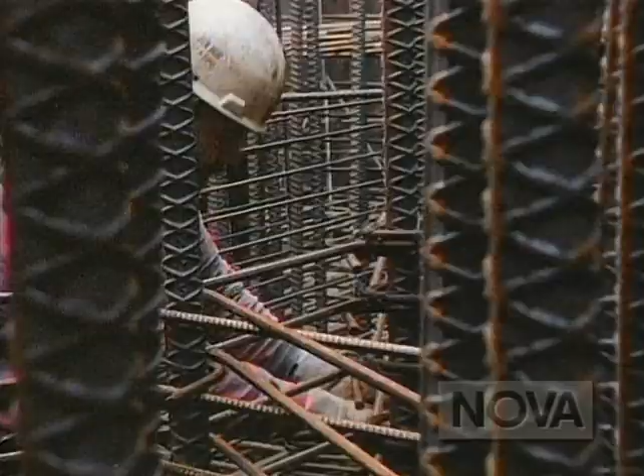Tonight on Nova, the Mississippi gets a state-of-the-art bridge. Nobody had ever done this before anywhere in the world. Be on site as we dive and drag, pound and pour, around the clock, against the elements. Lately, our luck's been running pretty sour. You can't control the load. It's out of control. Make way for the bridge of the future. A Nova 2-hour special, Super Bridge.

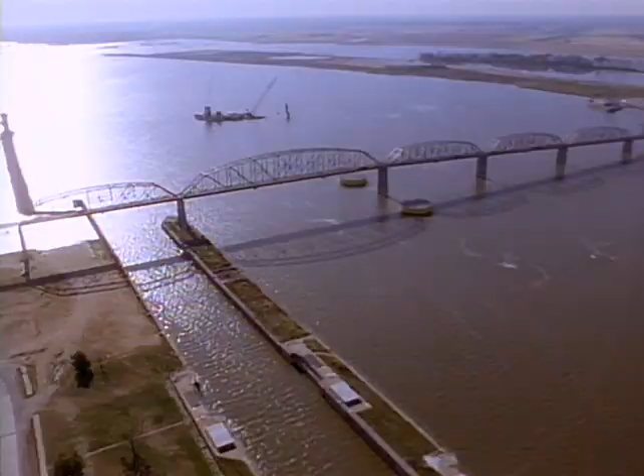And as the bridge ages and becomes less and less fit for the job it was meant to do, Alton begins to fear that its economic prospects are being squeezed as well. By the late 1980s, the town and the state governments of Illinois and Missouri are all in agreement. They and the river need a new bridge at Alton.

Over the next 4 years, Joe Leach will supervise a team of specialists who will ensure the quality of the new bridge. A consulting engineer, Leach has been hired by Illinois to check every detail of construction. Nothing can be taken for granted. At stake will be Leach's reputation, his career, and most importantly, the public safety.

We have a contract with the Illinois Department of Transportation, but we have a bigger contract, and that contract is with all the taxpayers in the state of Illinois and the general public that will use this structure. Because when we walk away from here, we want the general public to believe, as they should rightfully so, this structure is sound. You can use it, and you can use it safely.

Every time a bridge crosses a river, it has to solve a unique set of problems in safety, aesthetics, and cost. Changes in technology have always led engineers to new designs, but it's never an easy choice.

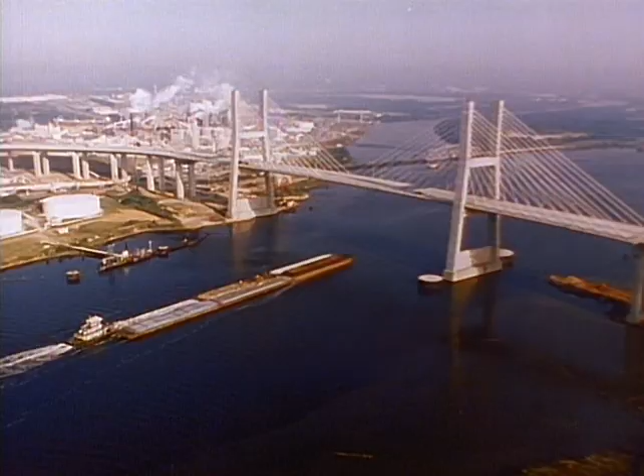The designers of the new Clark Bridge begin with a single pair of towers which will support the whole main span. Ordinarily, the cable stays would be placed in a single plane like this. But the Illinois Transportation Department wants the road deck supported at both outside edges, not only for maximum stability, but also for minimum cost, because a well-supported deck can be lighter using less steel. It's an innovative and cost-cutting design that has never been attempted quite like this anywhere in the world.

500 miles to the south in Vicksburg, Mississippi, the design will meet one of its first real tests. The Army Corps of Engineers has built an exact model of the Mississippi where it flows past Alton, between the old bridge and the site of the new bridge. Even the tricky currents and eddies are perfectly reproduced. The point is to see how the river, the old bridge, and the new bridge will interact.

In their design for the new bridge, the engineers have put one tower, or pier, right at the edge of the shipping channel, and the other pier as close as possible for the shortest and thus cheapest main span. This is the original location of the Illinois pier of the Clark Bridge. The Missouri pier location was fixed, and the navigation span was going to be 687 feet.

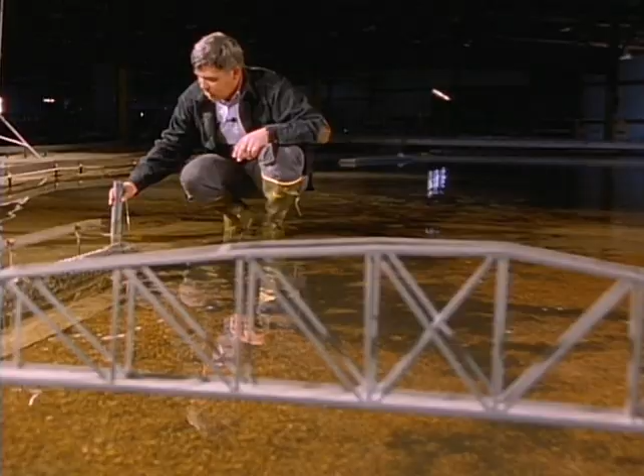After we evaluated the initial spacing of 687 feet as it was originally designed, we looked at extending the spacing to 850 feet from the Missouri Pier to the Illinois Pier. One of the concerns is that the longer you make this spacing, the more expensive you make the bridge. Eventually we looked at different alternatives, and the final resolution we came up with was to move the pier so it lined up with the trail dike that the Corps of Engineers was going to build.

This dike will run from the old bridge to the new to help control the current. Together, the dike and the pier's new location will make the channel safe for the barges passing through it.

When all the elements of the bridge are analyzed, tested, and costed out, detailed drawings of each section are made. But for the engineers who have spent 5 years on the project, the ultimate satisfaction is the quiet elegance of the final design.

We design our cable stay bridges to match the environment, not just the span length or the vertical clearance, but where is it going to sit, how is it going to look. We want it to look like, as best we can, a piece of sculpture if we can do it. It's important to us that the bridge be a symbol of the area. In fact, we look at some of our designs as truly being signature bridges. They're bridges that are focal points of the community.

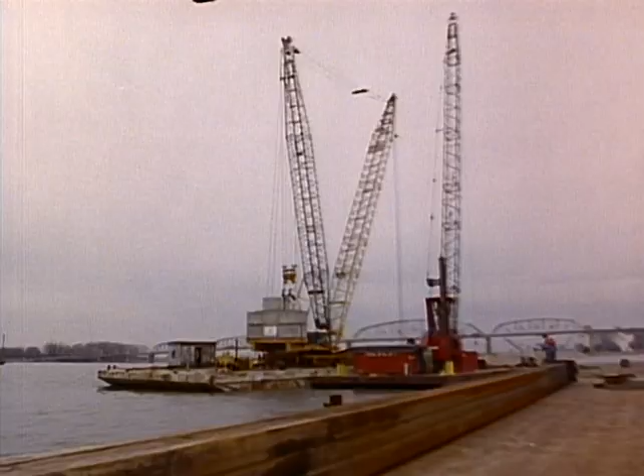By the summer, the time of planning is over and the gritty reality of construction is about to begin. The project team will have 3.5 years and $90 million to complete the task. For these construction workers, the job will be as tough as any they've seen. They'll work in all kinds of weather and even put their lives on the line.

Their average experience is 15 years. Their average salary is $21 an hour. As for their attitude, it's simply get the job done and get it done right, then move on to the next job.

For the general contractors hired by the Illinois Department of Transportation, the pressure will be even more intense. In construction, above all other businesses, time is money. Some of the contractors have even staked their company's future on finishing the job on time. Like Bill Webb, they've all made fixed bids, which means they'll all have to pay for mistakes and delays out of their own pockets.

I've made this statement several times before. It's about one step away from going to Las Vegas and rolling dice. It's a little bit less risky than that, maybe.

Supervising the contractors is Earl Dare, the project manager, or resident engineer for the Illinois Department of Transportation. A farmer-turned-engineer, Dare still lives near the family farm 40 miles downriver from Alton.

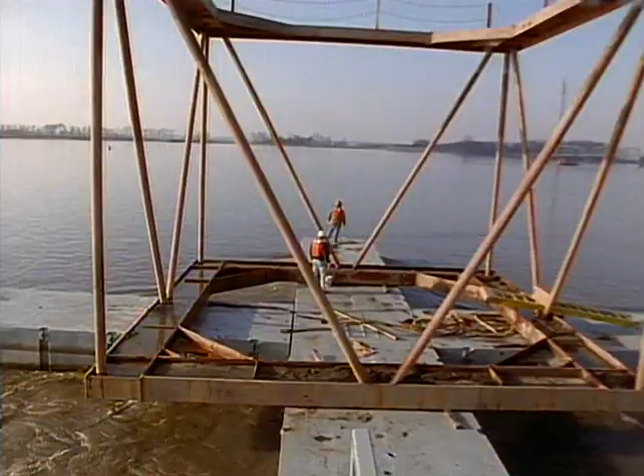As construction finally begins, Joe Leach oversees the placement of a huge steel frame which will rest on the river bottom. The anchoring of the frame is the first step in the construction of the main span foundations. We don't necessarily build this thing in a progression from one bank to the other. For example, in this project, we're starting in the middle of the river. In starting there, you have to make sure that everything is in alignment so that everything later will attach to it properly so that it will fit.

We'll get enough lines to hold it here to where we can get that other frame on. The river here is 4,000 feet wide, maybe not quite that far, and we're trying to get everything located to within 1/8 of an inch. The closer you are to, shall we say, perfection, the better the end product.

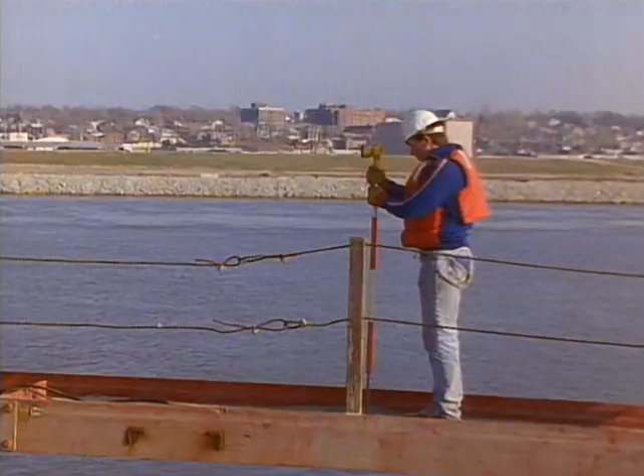Making sure each frame is aligned perfectly requires precise measurement and constant maneuvering. As the barge with the frame holds position 1/3 of a mile out in the river, a surveyor sets up his equipment on the shore at a geodetic marker. From this fixed point of reference, the surveyor will shoot a laser beam at a mirror mounted on the foundation frame. The frame is in position over the place where one of the foundation piers will be. By measuring the time it takes for the reflected light to return to shore and the angle at which it travels, the surveyor can calculate the frame's precise position.

But the powerful current makes it hard to keep the barge from drifting out of position. My boat's got me now. I'm going upstream, I'm holding myself down. How are we on alignment now? Hold what you got. Hold yours, Robin. The high side needs to go downstream 210. Illinois needs to go upstream 210. 2 more tenths on the upstream. Little more, Robin. Knock off a little bit, TJ.

When the frame is in the right place, 150-foot-long steel shafts called piles are lowered through the corners. Just boom him up.

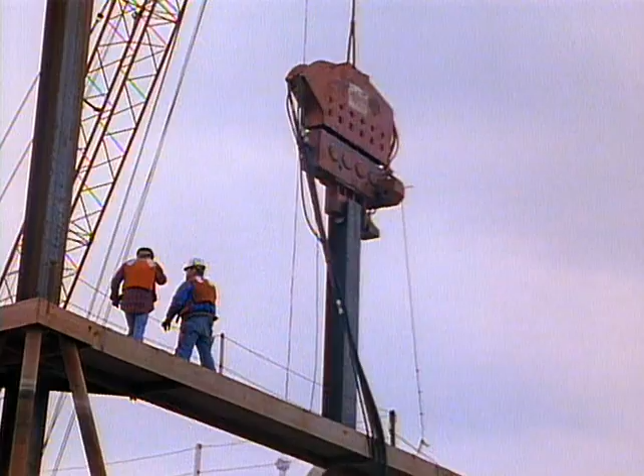When the pile hits the bottom, it will sink into the mud a few feet. Then it'll be pushed another 60 feet down. When all 4 piles are driven in, the frame will slide into the water.

Once the frame is in place, it's enclosed with a tongue-and-groove steel wall, slowly, step by step, one narrow panel at a time. The finished box is called a cofferdam.

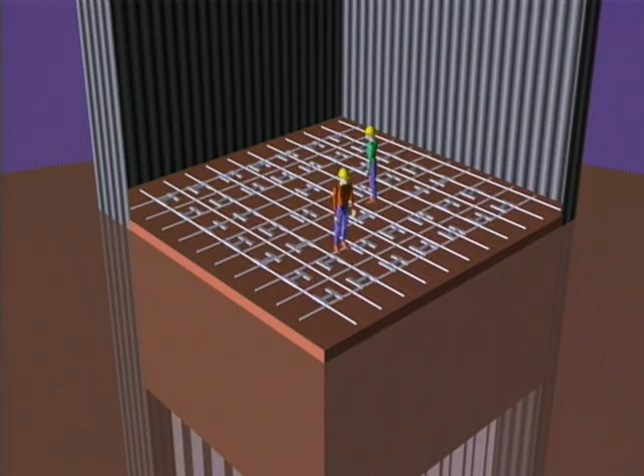Massive steel pilings are driven through the bottom of the cofferdam, through 80 feet of mud and gravel until the pilings hit bedrock. Then 8 feet of concrete is poured in to seal the bottom. With the cofferdam holding back the river, it can now be pumped free of water, enabling the crew to work beneath the surface. The crew's first task is the construction of an elaborate grid of reinforcing steel, which will serve as the skeleton for the finished concrete foundation.

Most of the reinforcement for this project was a massive jigsaw puzzle. The importance of this reinforcement all gets back to the fact that we do not allow concrete to take any tension. Now, it'll take a minute amount of tension, but concrete is, to look at, like a piece of chalk. It's very brittle, and it's very easy to snap. Where it starts to break or snap is where we have to have this reinforcement in there to take that tension.

Each reinforcing bar, each level of the grid, has been carefully designed by the engineers for maximum strength. When the reinforcing steel is buried in concrete, the finished foundation, called a footing, will have to carry the weight of hundreds of thousands of tons.

It's shortly after dawn on a chilly December morning when the first concrete pour begins. For the next 15 hours, trucks will arrive every 7 minutes - 130 loads of concrete in all.

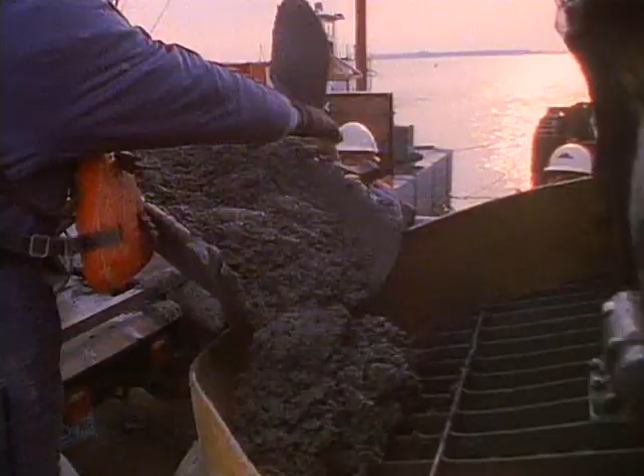The concrete arrives already prepared. A sample from each load is tested just before it's poured to make sure it has the right consistency. Too much water will weaken it; too little will create air pockets when it hardens, reducing its strength. After testing, all the concrete needed for this footing - about 2,000 tons of it - is pumped through a long pipe to the crew in the cofferdam below.

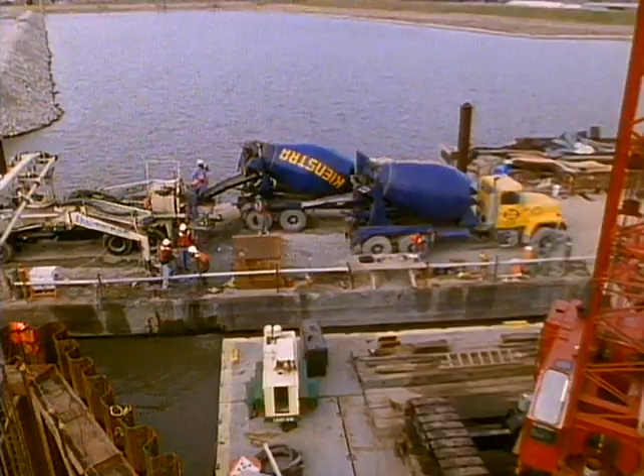The pour cannot be stopped once it begins. It has to be continuous to ensure that the concrete sets properly. 12 feet below these men, the reinforcing is so tightly placed that the concrete won't flow without help from electric vibrators. But it isn't easy to keep your balance on the slippery steel.

Sometimes it's like down in that hole. The guy make the wrong move down there and you'd be singing soprano the rest of your life. So you never know what's going to happen on a construction job, you know. Things be going along good and all at once everything starts going bad. But today, the work has gone smoothly, and there's nothing more serious than the usual aches and pains.

Pour is essentially complete. We probably got another half hour to go yet. Men have done their jobs well today, and you have to consider they've been here since 7 o'clock this morning, and it's now getting close to 10 o'clock. The same crew has been at it all day. You can imagine their arms and legs are pretty tired.

Oh, there's a job, buddy. That was a day's work.

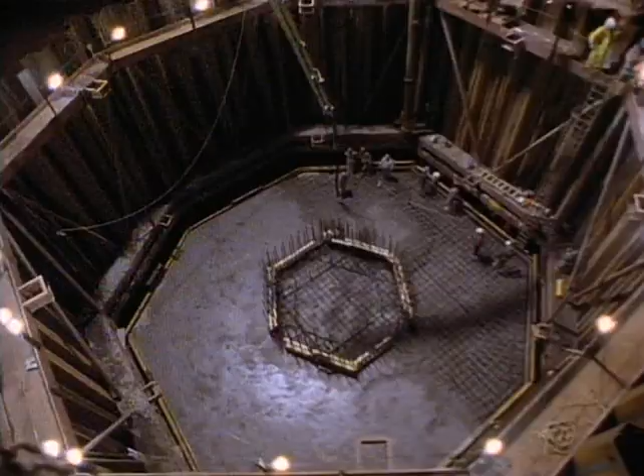Finally, after months of the most painstaking effort, the main span foundations rise out of the water within just 1/8 of an inch of their planned positions. All of these hidden things and that which was built below water are very important. The foundation for this bridge itself is one of the most important things we could have, because that is what holds this whole thing up.

If we had piling that weren't driven properly or weren't driven to the right bearing or to rock, we could have a possibility of the whole thing sagging to one side or the other. So these things that can't be seen is what the public puts a good deal of trust in engineers to make sure that the stuff is properly installed.

The next step is the construction of the foundations for the Missouri approach to the bridge. Here, the engineers have had to be unusually innovative because the river is 70 feet deep on the Missouri side, and the pressure at the bottom would crush a conventional cofferdam. Their solution is to build a platform on stilts 40 feet up from the bottom where the water pressure is much less. This platform will then serve as the base of the cofferdam.

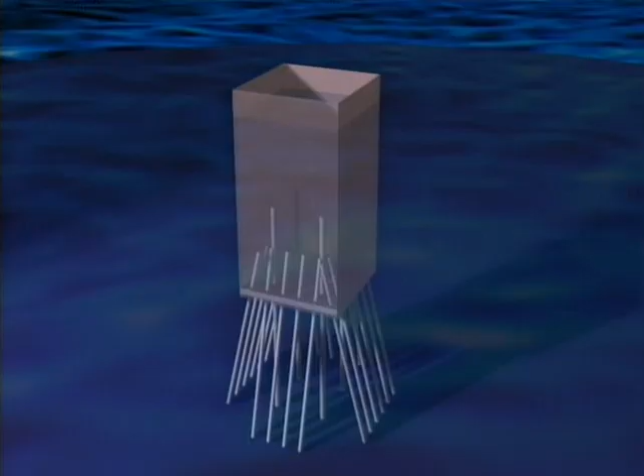Next, 24 steel tubes are hammered all the way to bedrock and filled with reinforcing and concrete to become the permanent supports of the Missouri approach foundations. Then the walls of the cofferdam are built panel by panel. The holes in the concrete slab where the tubes go through must now be plugged by hand.

The work is handled by a few men taking risks that most would shun. They begin one frigid morning. It's pretty cold down there. You can make it about an hour before you get real cold. And we'll be taking turns. Me and him be taking turns doing it. He'll probably be in there 45 minutes or so. There's no visibility at all. Well, you just feel around down there.

I have my hand on the pipe. Waiting on it. Drop a little one in there. Here comes the little one. There's a concrete pad down there that is supported by these rebar, and these 30-inch piling are drove through there, and he's sandbagging around the piling so when they pour the seal down there the concrete doesn't run out around the pipes. Drop me about 4. 4 big ones? Yeah. 4 big ones, Tom.

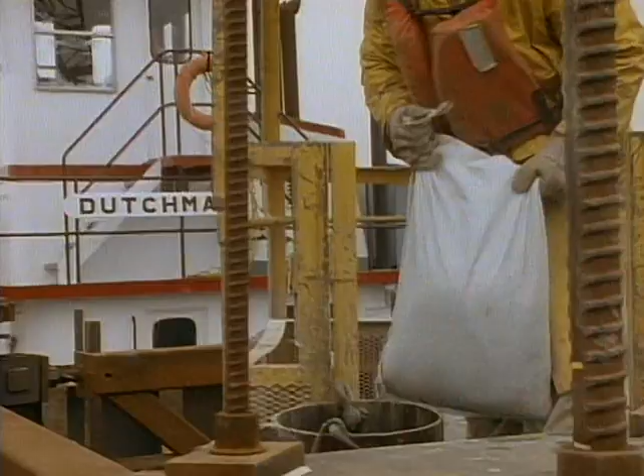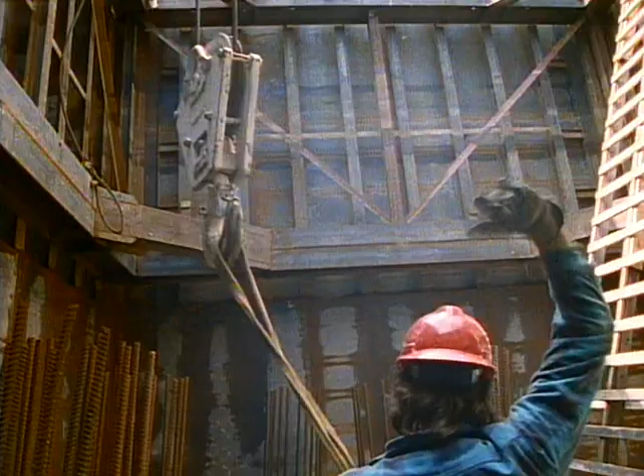The bags contain sand and cement that, once submerged, will harden into concrete, sealing the holes. Only then can the cofferdam be pumped free of water. But the diver's work isn't over yet. 2 sections of reinforcing steel must still be lowered into each of the tubes before they're filled with concrete. But while the crew is working, several sections break loose in some of the tubes. When the crew fails to fish them up with a hook, they have to send down a diver.

Ten minutes later, the signal comes. It's an exhausting and dangerous dive, but it's only the beginning. 3 more sections of reinforcing steel will be snared by the diver in this cofferdam alone before the day is done.

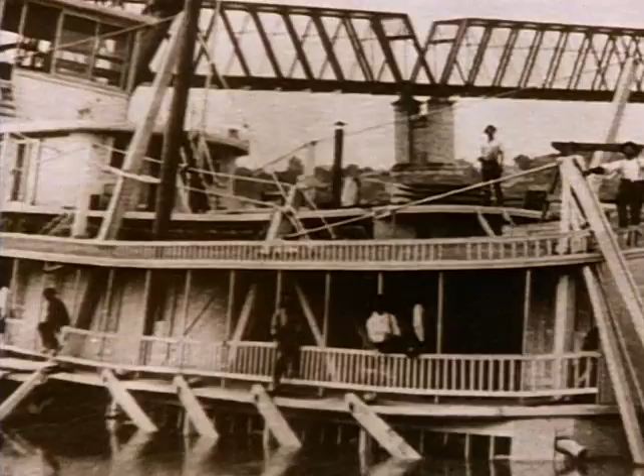Finally, in 1856, a new era began, when the first bridge across the Mississippi was built between Rock Island, Illinois, and Davenport, Iowa. But there was trouble almost immediately when a steamer rammed the bridge and sued the railroad. Arguing for the defense was a young lawyer named Abe Lincoln. "A man has as good a right to go across a river as another has to go up or down it," he declared. Lincoln won the case, and bridges have spanned the Mississippi ever since.

Although most of the earliest ones have long since disappeared, a few remain, triumphs of design and engineering. These are the ancestors of the new Clark Bridge at Alton.

When the main span foundations are finished, it's time to build the towers on top of them, section by section, until they rise 300 feet above the water. Realistically, a half-yard block of concrete is going to be plenty, ain't it? McCarthy Brothers Construction of St. Louis has less than a year to finish the towers. Ted Downey is the project manager.

You know, just ferry them in back and forth. Working over water is one of the toughest things you can do. You have to plan every morning, which we do. We meet every morning with the staff for just a few minutes because you can't just walk out and take something or drive out and get somebody. Everything has to be maneuvered by tugboats and barges.

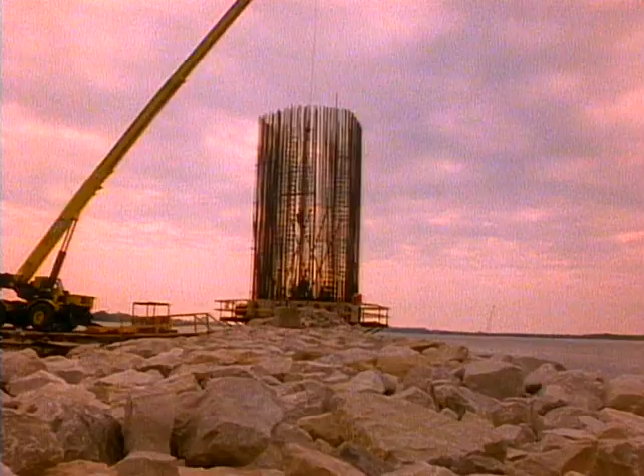At 7 in the morning, a McCarthy crew of about 30 is taken by boat to the site. Already, the dike has been extended to the Illinois main span foundation by the Army Corps of Engineers. Today's job is to add more reinforcing steel to the foundation as the tower grows. This wire will hold the horizontal reinforcing bars in place until concrete is poured.

But the vertical reinforcing will get special treatment because it must carry more weight. It needs a connection as strong as the steel itself. So on the end of each vertical bar, there's a steel cylinder or sleeve guided over the end of a ridged bar already embedded in the foundation. Then a splice is made by a special tool called a swager. It squeezes the sleeve so tightly that both ends of the bar are joined together in a permanent bond.

Hey, Dave? Yeah. Do a favor for me, sir, while you're there? I guess I owe you one, don't I? Yeah. Can you check the elevation?

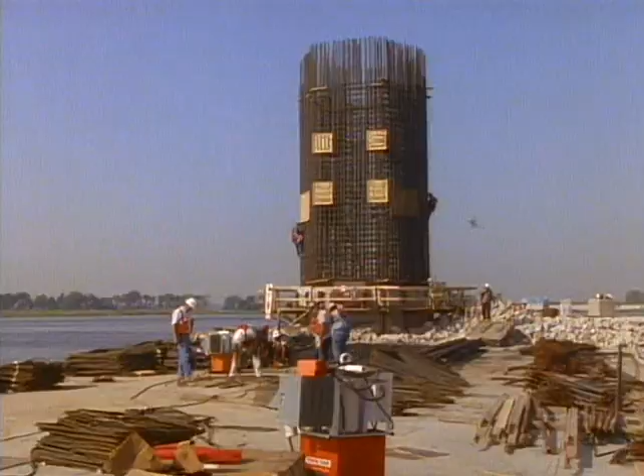After 3 months, the first sections of reinforcing steel are covered by concrete. The towers are now 70 feet above the water. But in the late fall here, the weather often takes a turn for the worse. A rising wind is the harbinger of winter. Just as the steel forms for the next concrete pour are hoisted by crane, the wind decides to gust.

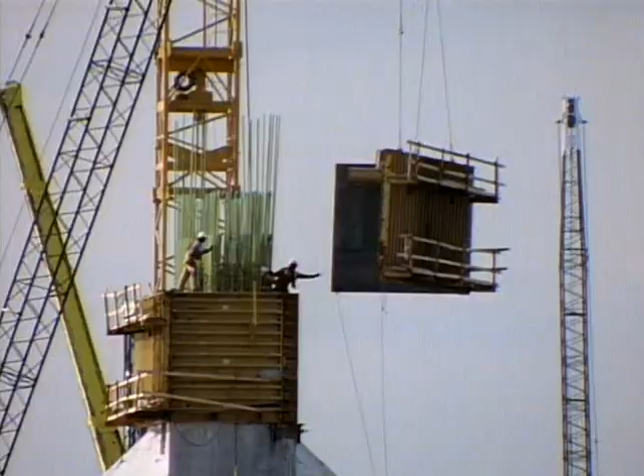Lately, our luck's been running pretty sour, to be honest with you. In behind us here, that form above on 10, we had problems with that. We attempted to set that form 3 times and had to set it back down. You can't control the load. It's out of control. The wind controls it. In other words, you don't control it.

Yeah, if the form would happen to spin, like I said before, and got hung up in this boom, that could be bad. You could lose the boom. Or it could knock somebody off the column. Or it could damage the existing concrete, the re-steel, or even a form if it got away from us. But those are some of the hazards of setting these big forms like this in these high winds.

They're talking about 30 to 35 mile-an-hour gusts. Today? Yep. And what you see is what we're gonna get for the rest of the day. It's not gonna let up any. You don't think we could just get up there tight to it and ease it up and slip it down over the re-steel? Talking about, it'll catch a lot of wind. Okay. So your gut feeling is? I'd rather not. Better not do it.

That afternoon, rain arrives on the heels of the wind. But on the ground, work continues on a new section of reinforcing steel. When it's finished, it will be lifted to the top of the tower in one piece. The iron workers have special guides or jigs on the deck to make sure they assemble the bars in the right pattern. The reason for all this intricate layout work is that this tower tapers ever so slightly from elevation, say 500, all the way up to 630.

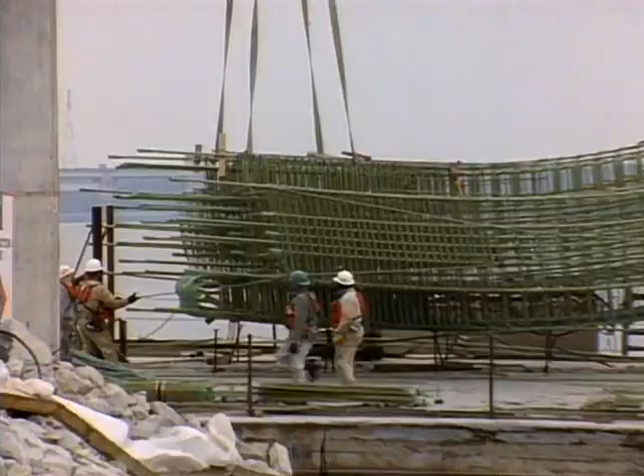It will take a day and a half to finish the job. From now on, the towers will grow in these 40-foot increments. And the efficiency and safety of it all depends heavily on one of the most isolated men on the job, the tower crane operator. He can make the difference between profit and loss.

I detest heights, but up there, I'm inside of a cab. It doesn't bother me when I'm high. It really doesn't bother me. Just take a beam this size and put that thing 10 feet off the ground, I couldn't walk it. But something like that, if I'm inside of something, it's like a safety factor for me. It's the way I am, it's the way I've been all my life, and always will be.

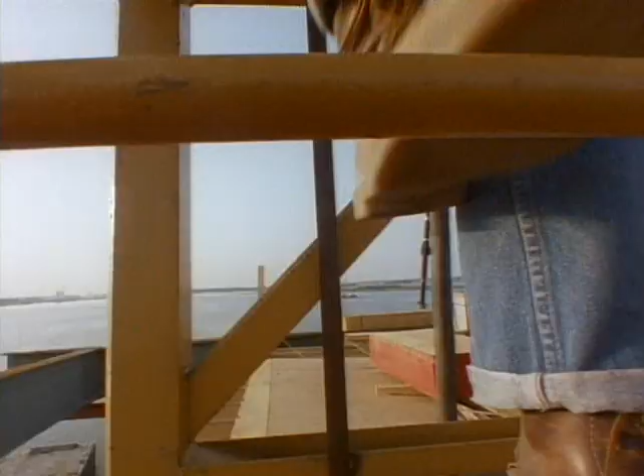Just getting up there, it gets you awful winded. It's a long climb. That's my home for 9 or 10 hours a day up there. On a clear day, I can probably see 20 miles. When I get here, they go to work.

Touch her up easy, Bruce. Hold that, Bruce. Just a touchdown. Hold that. What are you reading? 20,100. All right. Bring her down to about 12. I'm ahead of it about 2.5 feet now, Dave. It'll blow on the wind down here, Tim. It'll be a straight wind. It'll be a lot easier to control it that way.

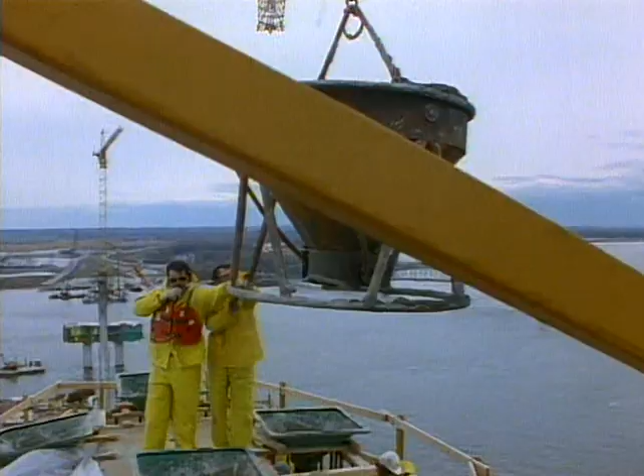Once the steel forms are in place, the next concrete pour can begin. At first, everything seems to be normal. There's only one problem. The concrete the crew just poured has failed the early strength test.

I took a hammer and chipped some of the concrete off the surface, and I noticed that it was very soft. It was very lightweight. I took a sample down with me to the field office, and I noticed it was so lightweight it would actually float on the water.

When you're stuck with over 600 cubic feet of bad concrete, your options are extremely limited. In fact, you have only one. Get rid of it, and fast. We're in the process now of taking it down to a certain elevation that the state said where it's good concrete.

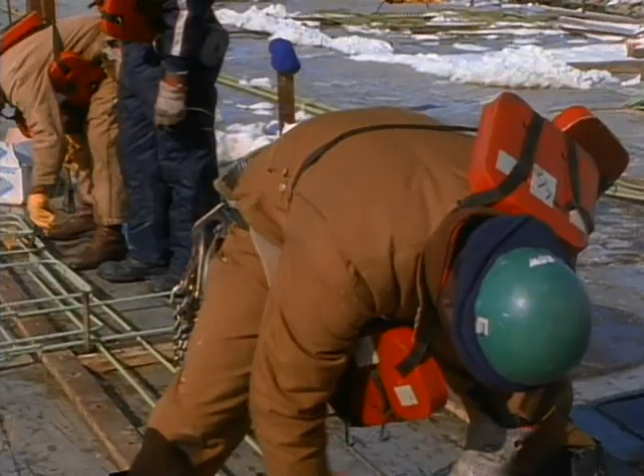Every construction worker knows someone in the trade who was in the wrong place at the wrong time. We had a friend of ours just killed a couple weeks ago, you know. Accident, some unforeseen thing. Hooked onto a load, and evidently he was under it or in the path of it, and some kind of way he worked out of the chokers and fell, broke a number of bones in his body, and a couple weeks after he died. So most of the guys out here are real safety conscious. The company is safety conscious itself. We don't want to see nobody get hurt.

To be safety conscious is not always enough, though, as each worker knows. Consider the case of Tim Summers, a carpenter who owes his life to a stroke of luck. Some would call it a miracle. If you got a picture of those tower cranes that's on there, he basically fell maybe 100 foot. It was quite a fall. Just lucky he didn't get killed. I don't know how to swim, so this life vest is the only thing that did it for me. A bolt gave on the scaffolding, and I fell about 75, 80 feet.

I hit my head on something on the way down. I'm not quite sure what it was. Hit the water. I missed the barge by 12, 15 feet, I guess. That was where I lucked out. And I just popped up. Just came right out of the water and grabbed onto the ladder. It was right there. Climbed right out. Like nothing ever happened. Well, no. It was like something happened. I just happened to luck out and not hit the barge, and the ladder was there. Otherwise, I'd have been right underneath the barge.

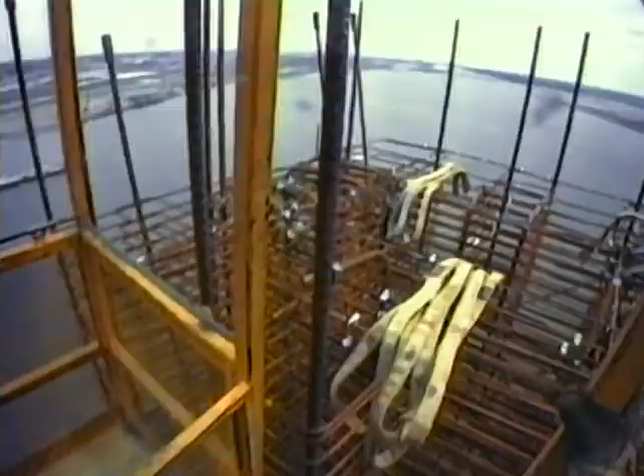Kind of stoic understatement rules here. But it doesn't take outsiders long to figure out just how dangerous this job really is. All you have to do is look around. Just watch as two ironworkers finish off the latest section of reinforcing steel, 250 feet above the water.

I see him coming in. So high, Dick. 6 inches, not 6 feet. Is that the speed you want? Yeah, you're doing fine. Just keep on coming down. Hey, Tommy, put the safety belt on and hook off. Hang on, man. I'm gonna have a finger from this. Hey, this is late, son. Oh, I didn't see you. You're getting me nervous. Keep them apart, babe. All the time. There too. There are too many of them knuckle busters. John, when you hook up these next ones, take them all the way up to the bend in the hook.

So far, no one's been seriously injured on the job. Then again, there are still 20 months to go.

It's now February 10th. Don't mess with me, Tim. Come on down, Nancy. Good. Don't mess with me, Tim.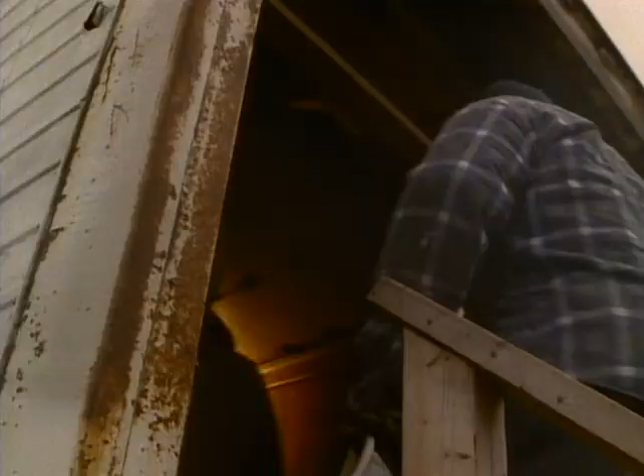A typical 8-hour shift begins at 7 a.m. Most of the workers live within 15 miles of the site, but some had to travel more than an hour to get here. We're gonna go out and attack the sub-zero weather. Yeah, it's wind chill minus 2. If they pull them forms, you know what that's gonna be like.

If you're a construction worker, you have to show up no matter how miserable the weather, because you won't get paid unless you do. My adopted dad here. Workers pride themselves on their toughness. But winter on the river is especially hard.

The sky promises more snow. An hour later, it begins to fall, lightly. Then more heavily. It's good weather to get frostbite and stuff, you know, just no need to take a chance.

Despite the weather, the two towers are nearly finished by the spring. Within a few days, one crew puts in the first steel girders that will support the road deck. At the same time, another crew is getting ready for the final stage in the tower's construction. This curved saddle-like structure will crown each tower and hold the bridge's cables. It goes up in two pieces, which must be joined at the top.

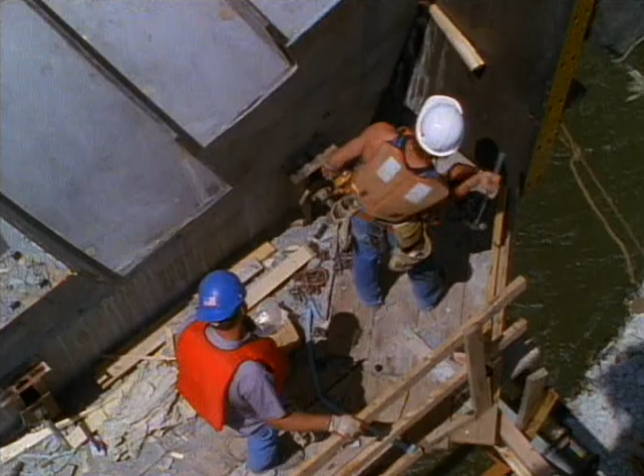Straight up easy. Going up. Going up a little bit. Later, this space beneath will be filled with concrete, permanently supporting the plates and the cables that will drape over them. And so for the last time, buckets of concrete are sent to the top of the towers. When the concrete is set, the steel forms are removed. The towers are finished at last. The end of a long struggle against time.

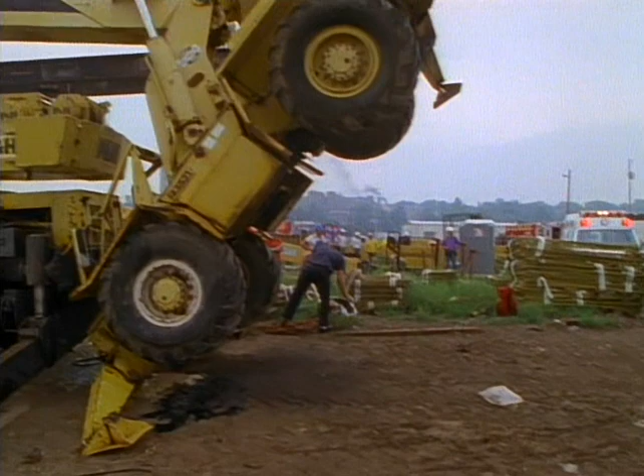The towers aren't the only part of the project, however. On the Illinois shore, another contractor must build the approach leading to the bridge, and he's already running late. Things quickly go from bad to worse. An accident stops construction in its tracks only a few weeks after it begins. A crane is tipped over while trying to lift an oversized load. Worse, the operator may be hurt, although how badly isn't known yet. He'll be taken to the nearest hospital for tests. This is the moment that everyone dreads, the possibility of a serious injury. Fortunately, the man will recover, but the same can't be said for the schedule.

There are further delays when dredging begins for the underwater foundations. Something is down there that the crew didn't expect. We couldn't complete the excavation because we hit something and couldn't get through it, around it, or under it. So we sent a diver down to take a look at what we had, and that's when we found out we had a barge. And they're chopping through the inner bottom right now, and it could be up to 200 feet long. And all we need is a section big enough out to get our pier in right here.

We can't do any work here on pier number 13 until this is resolved. And one of our cofferdams is directly over this sunken barge. So until that barge is removed, we can't go to work on pier number 13. Number 13, that's a lucky number, isn't it?

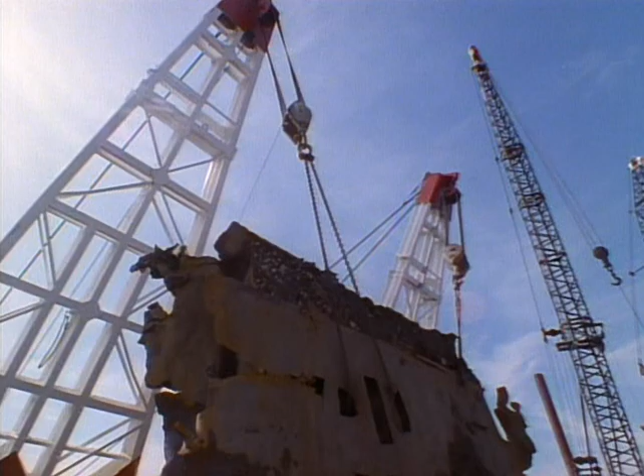Our costs to keep a job like this going are maybe in the neighborhood of $100,000 a month. So if you lose a month on a job like this, you never recuperate all of that. That's part of the risk of doing business. With this huge square of rusty steel removed, the crew can finally go ahead with pier number 13. But the river yields to the bridge only with the greatest reluctance.

Even though at the present time things look relatively calm with the river, we know that it can give us problems, and it tends to be rather unforgiving. Some writers have even referred to it as a great brown god, and I think that's one of the things that some of us anyway, those of us who have worked on the river before, certainly have a healthy respect for and will always attempt to maintain a healthy respect. But respect may not be enough in the months to come, when even the bridge itself will be threatened by the river's might.

It's now two years after construction began, and the most challenging and nerve-wracking phase lies ahead. For the next 16 months, the crew will have to wrestle with untested techniques, costly mistakes, and even the river itself.

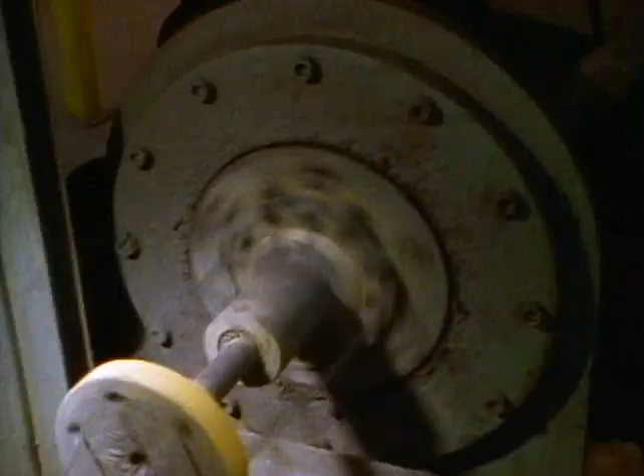The cable for the stays is made in Jacksonville, Florida. There are about 112 miles of it, wound in spools. Specialized machines spin the cable out of 7 strands of high-strength steel. To resist corrosion, the cable is then coated with epoxy. It's also covered with white grit. The grit will keep the cables from slipping once they're bound together.

The last stage is the waterproofing test, crucial because even minute spots of corrosion on the steel can lead to a devastating failure. Another potential problem is the enormous length of the cables, because they're designed to drape over the top of the tower in a continuous strand.

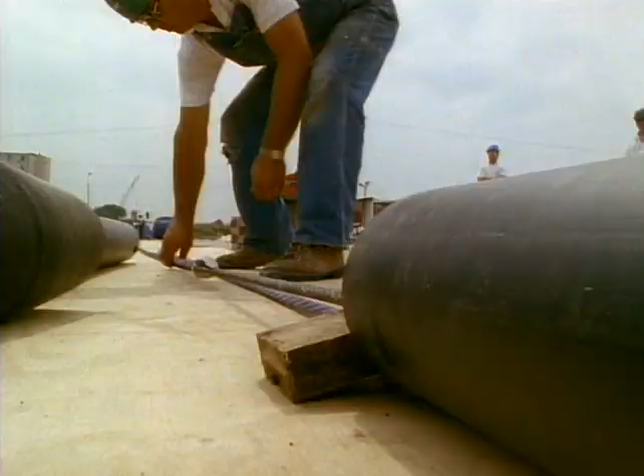As it turns out, the extra long stays quickly make for a construction nightmare. Initially, we were pulling the cables through the banana pipe up there, one and two at a time. By the time we got 37 cables pulled through, a good deal of the cables were unusable in the pack.

This was a method he had chosen to use, and we thought it's up to him to give it a try. After he had done that, we took it apart and looked at it, and this is what we found. One cable was actually rubbing over the top of another cable. As you can see here, it took off some of the epoxy coating, which we don't want. This coating that's on the cable stays is very abrasive, and as one cable was pulled across the other, it actually cut into the cross-sectional area of the steel itself, which would detract from the strength of the cable.

A month and a half has been wasted, along with thousands of feet of cable. There's no other choice but to start over from scratch.

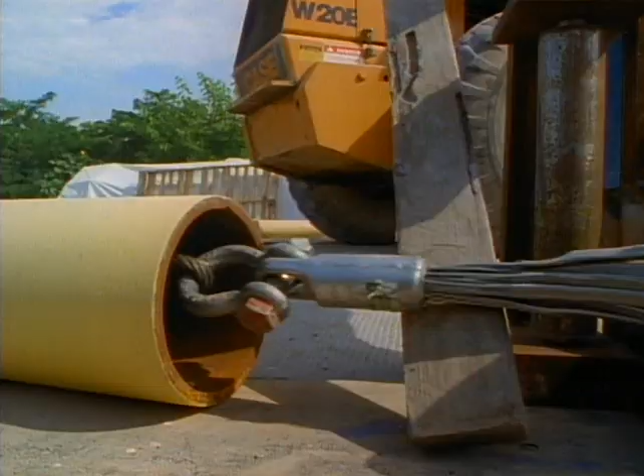Now we have developed a system of pulling the cables out individually and then putting them all together and pulling all of them together through the banana pipe. So they only make one trip through the banana pipe and they don't wear on each other. And it looks like this is going to be the way we're going to travel here.

The longest ones are like 768 feet long. Right now you're seeing cables that are only 400. As we get into more cables and longer cables, we don't know if our equipment can pull them. Want to get it up further, Ed? My gosh, we're going to be down the road a couple of blocks stringing the cables out. It's just going to present a whole new set of problems for us. But we'll just kind of have to work our way through them.

Nobody had ever done this before anywhere in the world, pre-assembling these cables like this. So what we're doing here is we're cutting new ground.

The next objective after the cable stays are built up is to take a configuration of cables like this and thread them through something called a wedge plate. A wedge plate is the device that enables us to anchor the cable stays to the structural steel of the bridge, and that's what will ultimately hold the bridge in place.

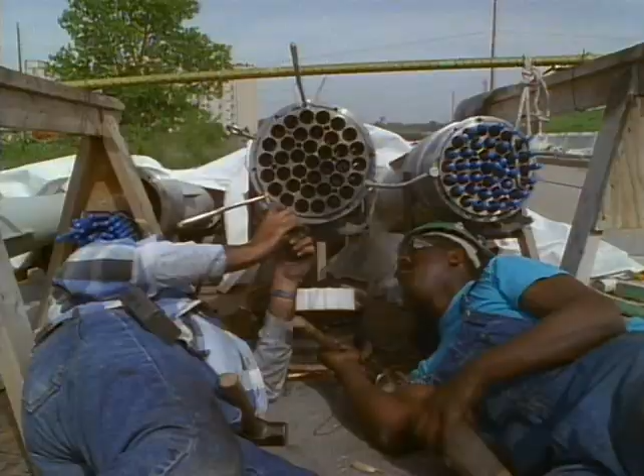That's number 22. It's kind of like threading 46 needles at one time. We're trying to line up 46 individual holes and thread all 46 of these through at one time. The alignment of the individual cables as they pass through the wedge plate is critical.

We want the cable to be perfectly perpendicular to the surface of the wedge plate. We also want the cable to be centered in its hole. The weight of the structure is carried by the cables.

That load is transferred from the cable to the anchor assembly by these little jaw devices, which are called wedges. They do this by small teeth that are cut into the wedges. These teeth bite through the epoxy coating into the steel of the strand itself. They're small, but they're mighty. I straightened this one up.

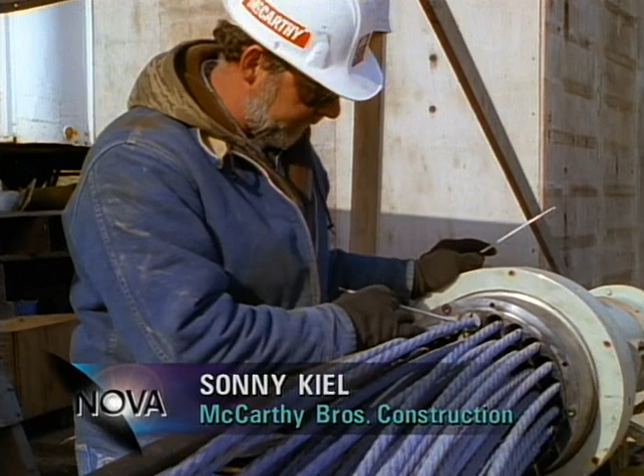These wedges have to be equally spaced around the cables to ensure proper fitting when they stress the cable out on the bridge. If you get two of them to one side, you cause a big gap over here, they'll bite the cable incorrectly and could actually kink it or cut it. Then you wouldn't have the strength on that cable. So each individual wedge gets special treatment. We look at each and every one of them and make sure that they are set right.

If the problem of assembling the stays has been solved, that still leaves another: getting them up on the tower.

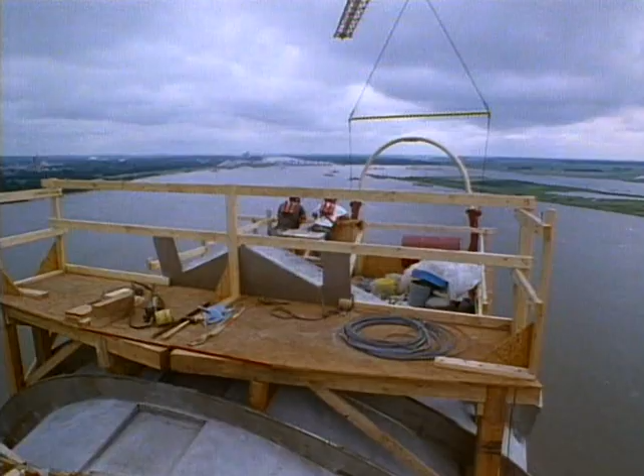The solution here is to move very, very slowly, both on the ground and in the air. It takes 3 cranes to lift the stay, 1 for the banana pipe in the center and 2 for the ends. When the banana pipe is just above its bed, the crew begins to move it into position.

Each stay has to fit perfectly into an anchorage slot. There's only a fraction of an inch to spare. When the stay is finally secured on top of the tower, other workers at the bottom turn their attention to each end. This is what knits the bridge together.

To pull the stays tight, special jacks called rams are then brought in. It costs $1,300 a month to rent just one. But they're the only tools that can do the job.

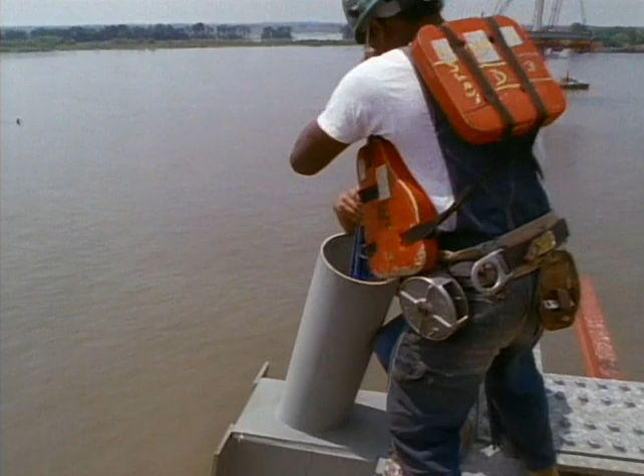Every time the cables are tightened, it takes 4 rams. The cables have to be stressed in pairs, 1 ram on both ends of each cable. First, the end of the stay is inserted into a guide pipe. Then each ram is installed far below the top of the tower at the stay's anchorage point. The cable is fed through. The ram grips it and pulls it tight, 12 inches at a time.

As the ram tightens the cable, the amount of tension is carefully monitored. Each stay is tensioned to a carefully calculated degree, tight enough to support the deck and loose enough to flex in the wind.

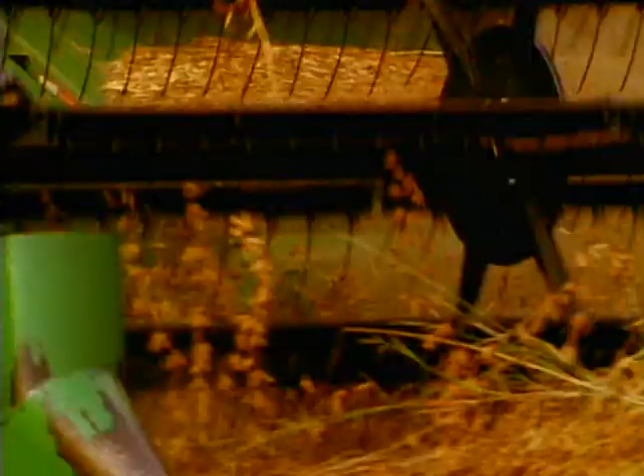When another summer has passed and autumn is painting the riverbanks orange, the surrounding countryside waits expectantly for the bridge and another harvest. Autumn is the time of reckoning for every farmer. Here, the grain is golden in more ways than one. It's the coin of the realm.

But even a fine harvest won't bring financial security to local towns. Too few people work on farms these days, and too many farmers are in debt. Instead, the hope of a place like Alton is to become a more prosperous suburb of St. Louis, a bedroom community with charm, a fine place to raise children, dogs, and property values.

And to keep the cash flowing, a prime tourist attraction as well, with reminders of Mark Twain's America, when Alton was at the pinnacle of its fame and fortune. But to make Alton great again will take more than echoes of the past. Alton needs a modern bridge for a modern age, and everyone knows it.

The bridge is big news, even at Alton's Eunice Smith Elementary School. Today, a class is taking a field trip to see for themselves. A model of the bridge has been set up on the banks of the river, overlooking the site.

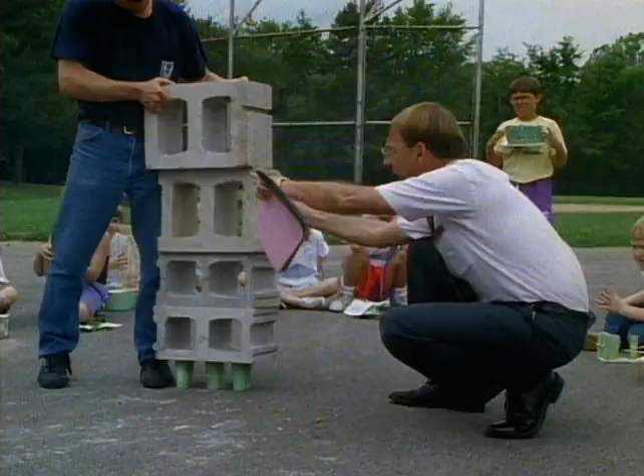The kids also witness firsthand the cruelty of gravity. And the winner? A model holding more than 100 times its weight, at least for a few moments. Definitely held three, definitely held three.

But it's the power and beauty of a well-designed bridge that fittingly ends the lesson. Big, Bright Bridges, a poem by Marlon Lancaster.

Big, bright bridges, radical, waving river, interesting, rocky roads, enormous, skinny spans, dangerous bike routes, great, beautiful bridges.

When the first cable stays and structural steel are in place, it's time to install steel girders for the road deck.

300 miles away in Des Moines, the fabrication of the girders takes place at a company called Pittsburgh Des Moines. The process begins with a plate of raw steel. This plate is destined to become an edge girder, one of 66 in all. When it's finished, the girder will run along the outside edge of the road deck. To make each one takes 3 immense pieces of raw steel.

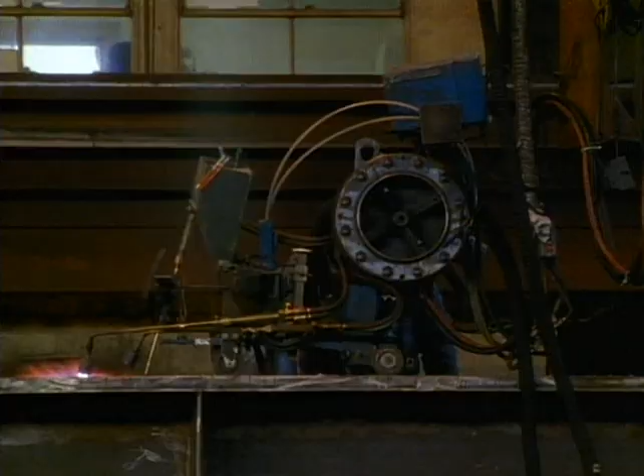They're all custom made. They're measured, cut, welded, drilled for bolt holes, sanded smooth, and swept clean. The company can assemble 3 of them a day at a cost of $30,000 each. 35 feet by 5 feet, the finished girder weighs about 17 tons. It will take 6 months to fabricate all the structural steel for the bridge's main span. Today, one of the first pieces is beginning the 18-hour trip to Alton at the dazzling speed of 20 miles an hour.

Back at the site, all the pieces must fit together perfectly. This section of the road deck arrives in 4 main pieces, which are joined together on the shore. Come down a little more. After it's assembled, the 100-foot section is hoisted up by a pair of cranes.

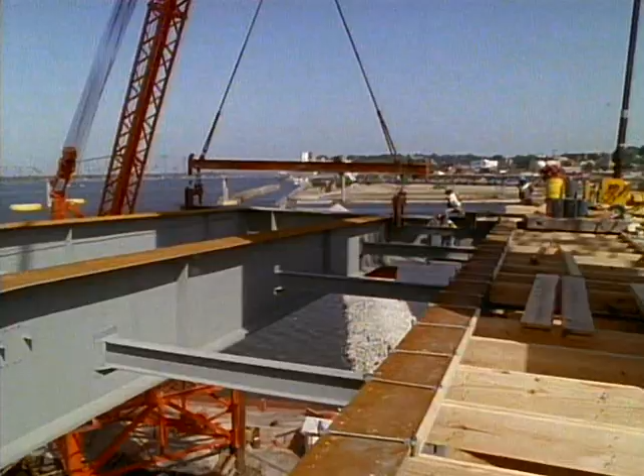And this is where it's headed, to a prime position close to the tower. The 2 crane operators must be enormously skilled, one at each end of 76 tons of steel dangling in midair. Coming up, coming up, hold that, hold that. Come on. Oscar, we're in, come on.

To line up the bolt holes, workers hammer in steel spikes called drift pins. Then the bolts go in, at first fastened loosely by hand, then tightened later for optimal strength.

In the newer steel bridges, they're going to lighter weights and stronger steels. Under the old bridges, they were so overly designed that it really didn't make any difference. You could have a few loose bolts, and the bridge would still be safe. But under these new systems, it is imperative that the bolts be properly tightened.

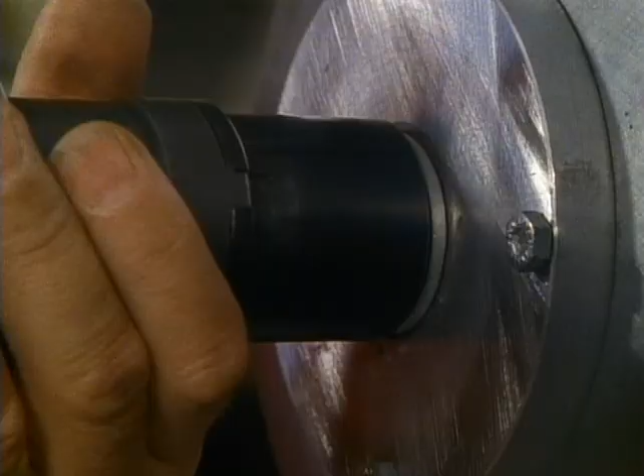This apparatus has a double socket, one on the inside that goes over the tip of the bolt, and on the outside which goes over the nut, and they turn in opposing directions. The nut will be doing most of the turning, and when it reaches the proper tension, the inside socket will twist the tip of the bolt off. When this tip is twisted off, you know that the bolt has been tensioned properly.

This is when the bolts face the greatest amount of stress. Since each section of deck must be installed before its cable stays can be attached, the bolts alone must carry the load for now. But they won't be asked to work alone for very long. Within a day, more cable stays will go up. And then the deck will be ready to carry its own burden.

These massive concrete slabs will become the roadbed for the bridge's main span. And so the process is repeated. As the structural steel pushes outward, the stays follow close behind, supporting the weight from above. Each cycle is supposed to take 2 weeks. But goals are one thing, reality is another.

In construction, you tend to get nervous when everything goes too well. You just know that something is bound to go wrong. This week's problem is a potential disaster. Even Earl Dare is becoming a bit grim.

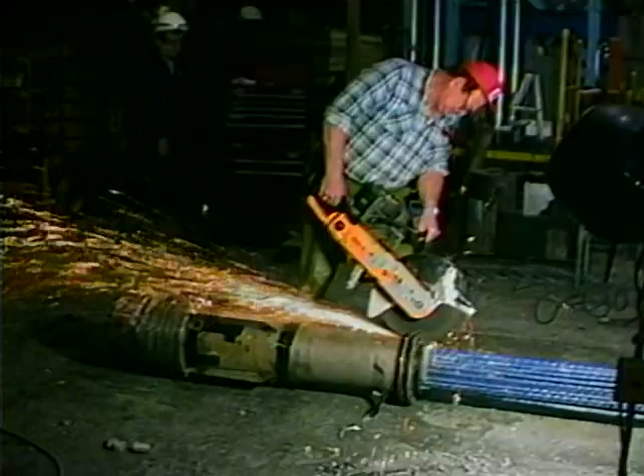The results of our first cable stay test just came in, and this was a full-scale mock-up of an actual cable stay. The results were not encouraging at all. We experienced a number of wire breaks. We experienced some corrosion. We know we've got some serious problems. I don't know if we'll ever be 100% certain, but all fingers point toward corrosion in the strand as it was being manufactured. We've got a problem if it fails again, and that it will delay the material's arrival to the job site. We cannot install any materials until these tests have passed.

The crew is running out of approved cable. And after that's used up, all work on the main span may have to stop. Further tests are ordered, but they'll take a month. For the management team, it's the longest month of the project.

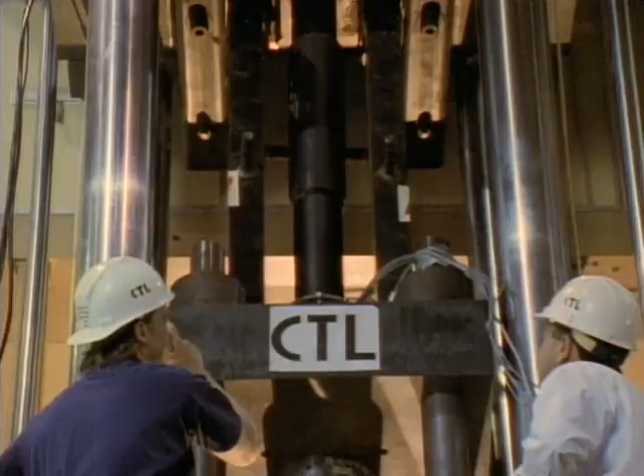This machine has been tugging at a section of cable stay every 2 seconds for 30 days now, simulating 50 years of wear and tear. The process is similar to taking a piece of wire and bending it back and forth until finally it breaks. The sample stay has already been stretched close to the breaking point. If it pulls apart now, it too will be rejected.

A failure here will cause even further delays and cost millions. The test is so critical to the project's future that representatives from the design engineers, the Illinois Department of Transportation, and the contractors are all here, waiting anxiously.

1 1/4 inch has moved since we started at 300,000 pounds. We just run it now for the duration? We just go through it now. It's got to be close. 946,000 pounds is the target load.

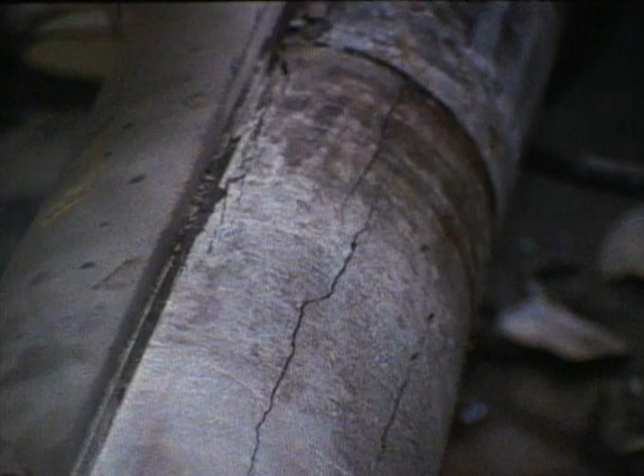But instead of a blood-chilling snap, there's only a deep sigh of relief. The sample has passed the test. When the stay is sliced apart for closer examination, everything is intact. Further tests of other samples will go just as well. The crisis is over.

There will be other crises, both large and small. The tightening of the cable stays has been plagued with problems. A little more down. Hold that. What? Well, right now we're taking the slack out of the cable. And I'm running the ram back in now to get another bite so I can pull some more out. And it'll pull it in 12-inch strokes.

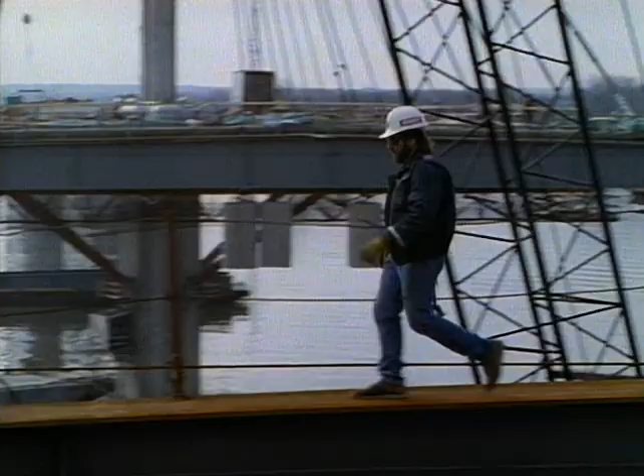Going on up here. And check the top, it's clear. You know, it sounds like it's going on inside the wedge head there. We better take a look at it. The cable on the other side is just hearing some popping noises, so we're going to check into it. All we're trying to do is prevent any damage at all to the cables. Anytime it does happen, we have to fix it. Otherwise, it won't accept it as is. You know, it has to be right.

2 strands are scraping again. I've got 1 wedge that's popped out. Same problem as usual. A recurring problem that we had last time. If one of the cables has slipped and is not gripping properly, all of a sudden the loads are transferred to the other 45 cables, and that's not what the designers intended.

Sometimes we find that these cables have evidently slipped somewhat, and what the crew has found out there is that some excess epoxy has built up inside the wedges. This prevents the teeth from gripping through the epoxy on the strand into the steel of the strand. The immediate remedy is to replace them with wedges that have good clean teeth that will again bite through the epoxy and into the steel of the cable.

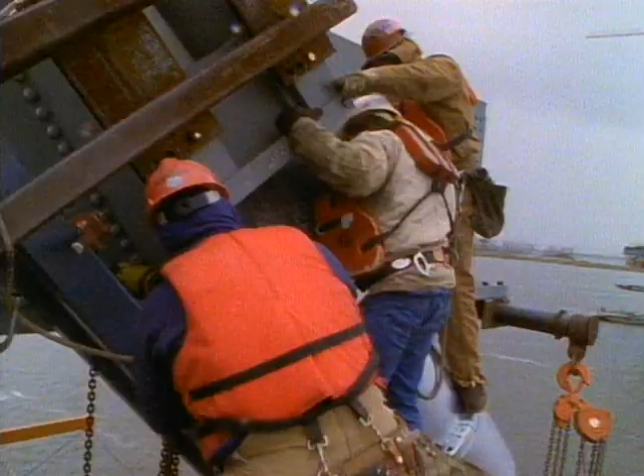Later, on the other side of the deck, there's another problem which has the crew mystified. The cables have gotten stuck in the ram. But this time, the culprit isn't a wedge. Once again, the ends may have to be cut and rethreaded. If we can get another 5 inches of pull, we can expose the whole thing. And get to the bottom of it, maybe. That's what I like to do.

Well, it's a piece of the same plastic that's this spacer that is up here. I imagine the piece might have broke off, or might even got placed in there on purpose by someone in the cable yard to hold it in place. I don't know. But it definitely doesn't belong where it's at. Foreign object. Probably from somewhere. Ain't moving at all? Here it comes, baby. Yeah.

Piece of wire tie. It's a piece of a plastic tie that they used to put around these strands. It got down in between. I think that caused our whole problem. 49-cent piece, buddy. Screwing up $1,000 worth of cables.

It's now January, and the crew has shifted its attention back to the top of the tower, where the wind is making its presence felt.

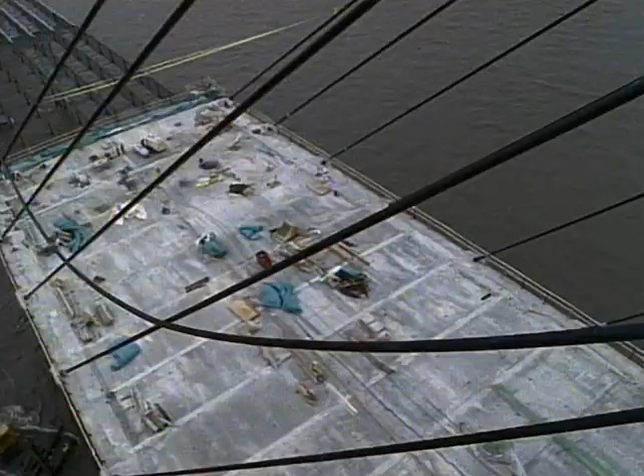It's dangerous enough for the crew 300 feet in the air, but how about the bridge? The elements sometimes seem to toy with it, shaking it at will. Anyone can build a bridge that will carry a given loading. But if you look at it the way some of us in construction look at it, it takes real craftsmen to build a bridge that will just barely carry it.

The bridge is now at its most vulnerable stage. Its 600-foot cantilevers are like kites in the wind. There are different theories as far as how much wind the bridge can withstand. You have cable that can freely move across the pylon head. The strand actually flows through the pipe, and if you get an out-of-balance force, the strand could slip through the pipe, causing the whole bridge to rock. It'd be very disastrous. Something we don't even want to think about. No one will really sleep well at night until the gaps in the bridge are closed.

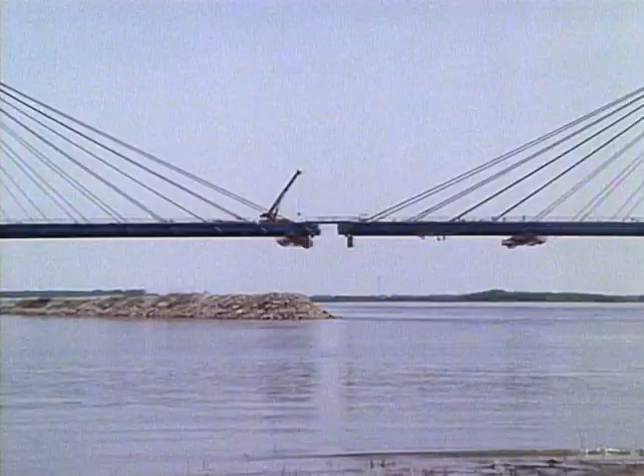The first gap between the Missouri approach and the main span is 35 feet wide. One down, one to go. The second gap is in the middle of the main span. When it's filled, the structure will truly become a bridge. After 2 years of work, a crew of 40 prepares to join both halves of the bridge together. But will they fit perfectly when the last piece is added?

The diagonal temporary struts down. A surveyor has been checking the position of the two ends since 4:30 a.m. Hey, Jimmy, let's do this side. It can move up to 2 inches this time of the year. Right there will be fine. In the summertime, when the heat, radiation from the sun gets on, it may move 3 or 4 inches easily. That's up and down. It also moves from side to side until it gets connected there, because it's like two separate entities right now that can swing back and forth.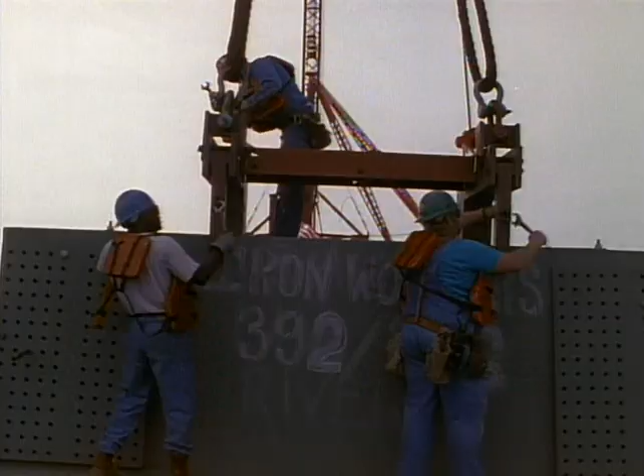Okay, pawl boom down easy. When the girder is finally in position beneath the gap, the cranes bring it up slowly. Much to everyone's relief, the girder fits in place. But the bolt holes will have to be lined up in time before the steel expands. Even a couple of degrees difference could make it impossible. At 12 noon, success at last.

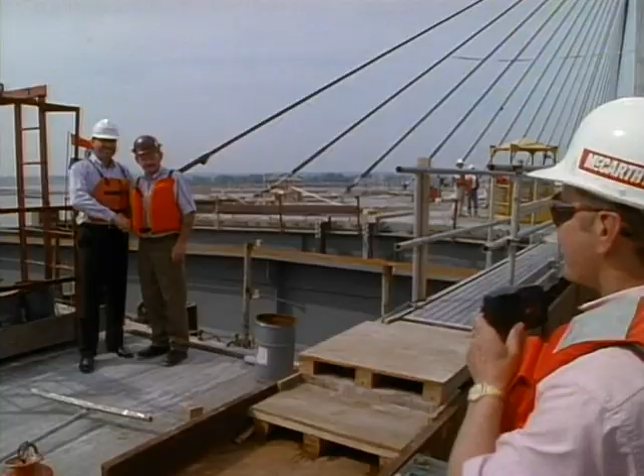Now, for the first time, the bridge is whole, spanning the river from Illinois to Missouri, just a few miles from where Lewis and Clark once crossed. When the last concrete panels go in, Earl Dare can't resist a small boast. No construction project is problem-free, but one thing about this structure, for the size of it and for the dollar cost, which is right at $85 million, there haven't been any major problems that we couldn't solve. My boss, Dale Clore, the district engineer, said this could well be the first bridge built across the Mississippi on budget and on time.

Little does Earl Dare know that the river is listening. In June, storm clouds gather over the bridge. The rain begins and doesn't stop. The river runs faster and faster, fueled by the storms that sweep in from the west. Only 2 miles from the bridge, the river rises 15 feet. People are used to floods here, but this is a deluge. There's a growing sense of helplessness. The neighboring town of Grafton is overcome.

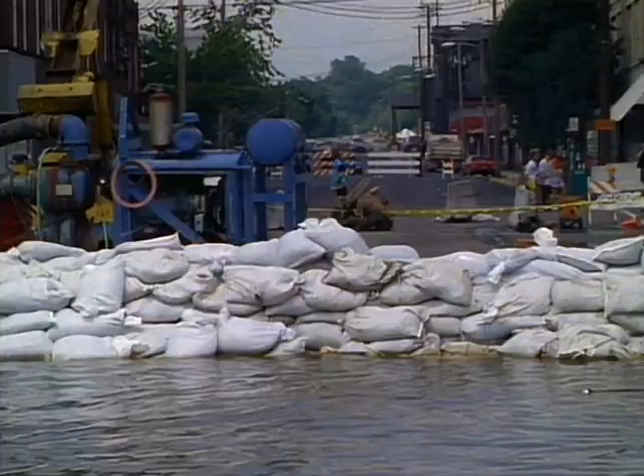Downriver in Alton, a new levee is hastily built. Sandbags are filled by hundreds of volunteers, adults and children alike, day and night. The levee is set back about 200 yards from the riverbank. It's Alton's version of the Maginot Line, the last barrier against the rising waters. By the middle of July, it's 8 feet high and 1,000 feet long. Everything on the riverside of the levee is given up for lost.

The river is so high now, the Missouri approach is in danger. Its construction site is already underwater. It can only be reached by boat.

Back behind me, you can see what was, or I guess still is, our office. The walls are buckled inside the trailer, and the water is up over the shelves in there, and it's getting in the furniture. The file cabinets and the desks will be full of silt and sewage and everything that's in the water. So snakes, rats, all those good things.

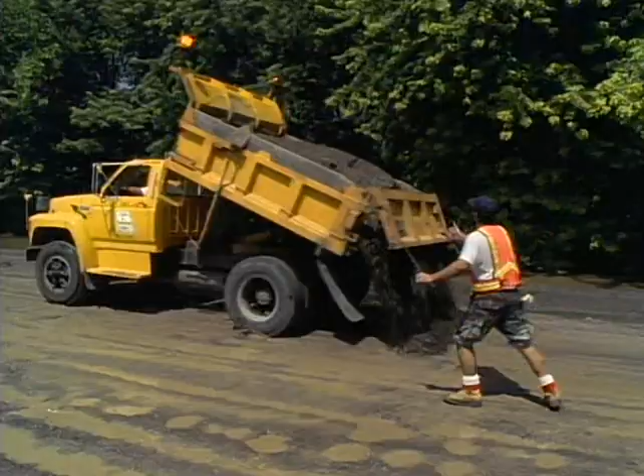Ironically, the old bridge is now the only one open for 20 miles to the south and 70 miles to the north. In a desperate effort to keep it open, the roadbed is raised by several feet. Truckloads of gravel are rushed to the site. One-way traffic! Long maligned as a bottleneck, the old bridge has become Alton's savior.

But the news grows worse each day. The flood is being called the worst in 500 years. Thousands of houses are lost. Property damage is in the billions. From Minnesota to Kentucky, 800 miles of devastation. More than 50 people will lose their lives. Everyone who can heads for higher ground, but the river is right behind them.

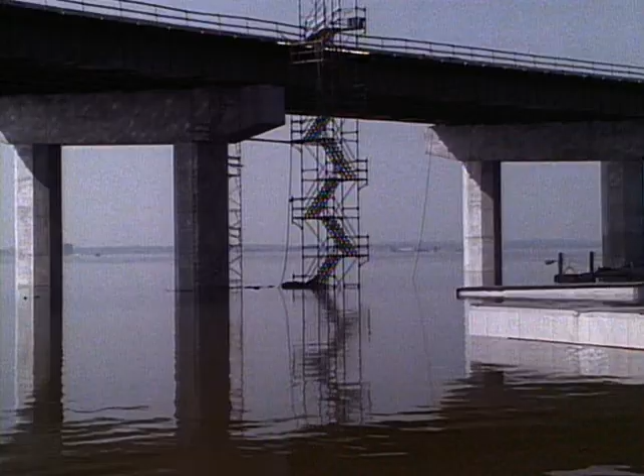The main span is also a mess. The crew can hardly do any work, and there is an eerie stillness at the site. They are so close to finishing, and yet time is running out. If they can't finish before winter, they could be shut down until spring. It's not until mid-September that the waters finally recede. Alton will be cleaning up for months. The losses in business and property are immense. And as the town ponders its economic future, the completion of the bridge takes on even greater urgency. In mid-September, construction resumes on the Illinois approach at maximum speed.

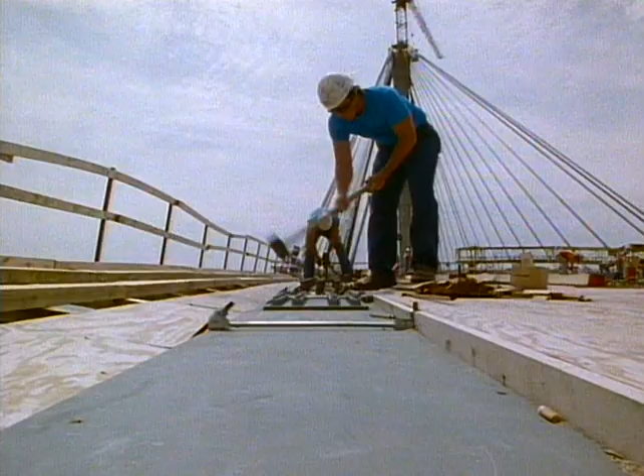The crew works 16-hour days, getting the road deck ready for its final coat of concrete. They begin before dawn on the day of the pour. The concrete they'll be laying down is a special type that can't be used if its temperature rises above 90 degrees. But at dawn, the forecast calls for an unseasonably hot day. Hot enough to ruin the pour.

And if that weren't enough, there's trouble on the old bridge, which the concrete trucks have to cross. A distraught former mental patient is threatening to jump. Traffic is backed up for miles while the police talk him down. The concrete trucks are hopelessly stuck. Their loads are ruined. The pour will have to be canceled.

The next morning, the crew tries again. But the temperature threatens to be even higher. The first load of concrete arrives at 4 a.m. In the early morning, the flow of work is smooth and steady. But by the afternoon, the crew is feeling the strain. Air temperature is getting close to 95 degrees right now, and they're starting to show some wear and tear.

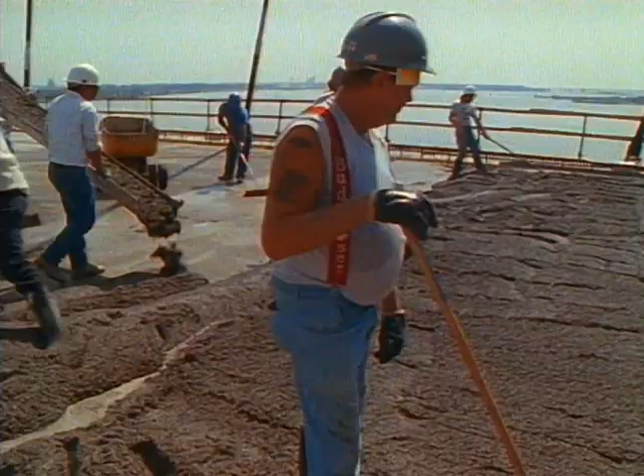We've got about 250 feet of concrete out on the deck so far. About noon, we were a little concerned our concrete temperatures were getting kind of high. They were approaching 90 degrees, which is our limit. However, the concrete plant added some more ice, and we're able to get the mix temperature down considerably. So we're going to continue pouring till about 3 o'clock this afternoon.

Most of these fellows got out of bed about 3 in the morning. They were on the job anywhere from 4 to 5 this morning. We've been pouring concrete since 6, and about 3 o'clock they'll all be beat.

Everyone is feeling the pressure. The contractors could face a penalty of $4,000 a day if they don't finish by December 21st. The foreman, the various superintendents, they're here around 6 in the morning, sometimes even as early as 4 o'clock in the morning. It's some very, very long days.

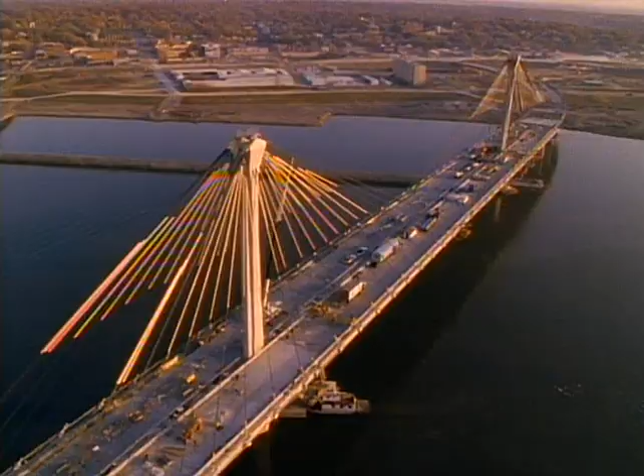And you don't make up for it. A job that was intended to be a normal business venture with an appropriate amount of profit turns out to be, at best, a non-profit operation. I guess you could say it starts to make an old man out of you. There are days when I feel like that. I'm not so sure I'd want to try this again.

There are just 2.5 months to go now. 1.5 months. 1 month. Only a small crew is left, working 12, 16 hours a day in bitter cold.

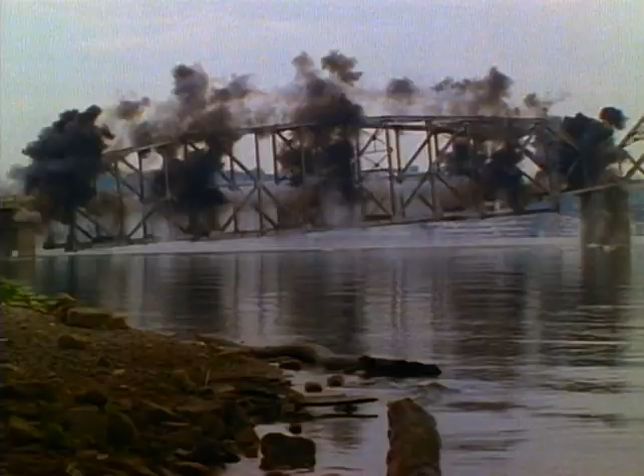I do remember it was in the year when the Model A come out, because my dad had just got a new '28 Ford, and he said he was going to try it over the bridge. So that was in 1928. And now, once again, there is only one bridge across the river at Alton.

But even the men and women who gave so much of themselves to build it know it cannot last forever. We'd like to think that the people following us think, my gosh, they really did know what they were doing. We'd also like to think that our grandchildren, perhaps our great-grandchildren, spend a good deal of time swearing at us when they come back to replace this and try to tear it down. Everything that's built comes down eventually.

But until the day the bridge is replaced, many years from now, it will stand as a monument to the people who built it and a witness to the river's never-ending journey.